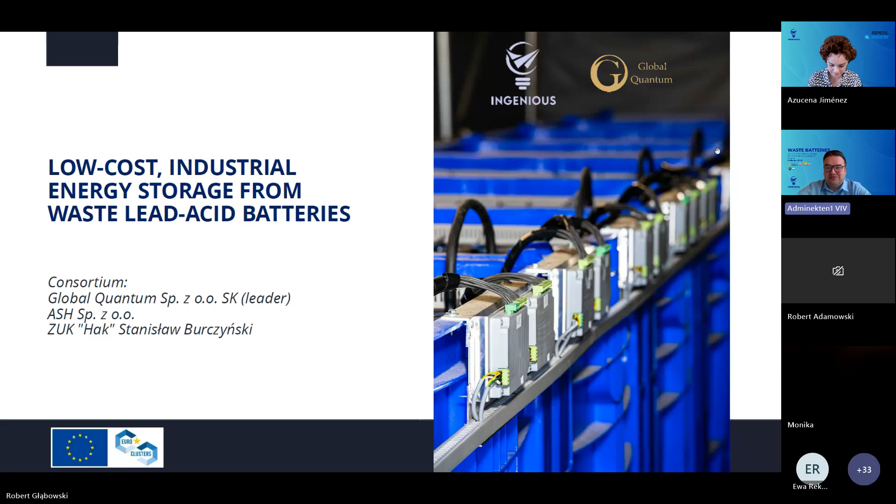Please imagine that by 2040, Poland will have to spend about 500 billion Polish zlotych on expanding its energy grid. It's a huge amount of money, and outdated power grids are unable to meet the required demand for new connections.

As an example, in 2023 distribution network operators denied connection conditions to 7,500 new renewable energy sources, and unfortunately this trend is growing.

This makes Polish enterprises no longer competitive due to the very high cost of energy, and they are denying connection conditions for planned photovoltaic installations, for example. So, is there any simple solution to these problems?

Yes, we think so. We created an industrial energy storage made from reconditioned lead-acid batteries. It is much cheaper, as I will explain later. It's made from waste batteries and quite durable, lasting up to 15 years or longer.

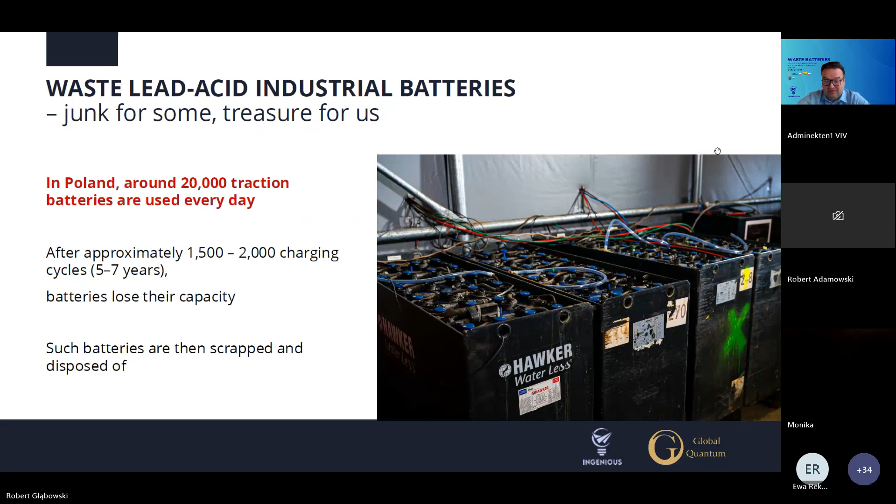In Poland, around 20,000 traction batteries are used every day, and after about 2,000 charging cycles, which takes about 7 years, batteries lose their capacity. Such batteries are then scrapped or disposed of.

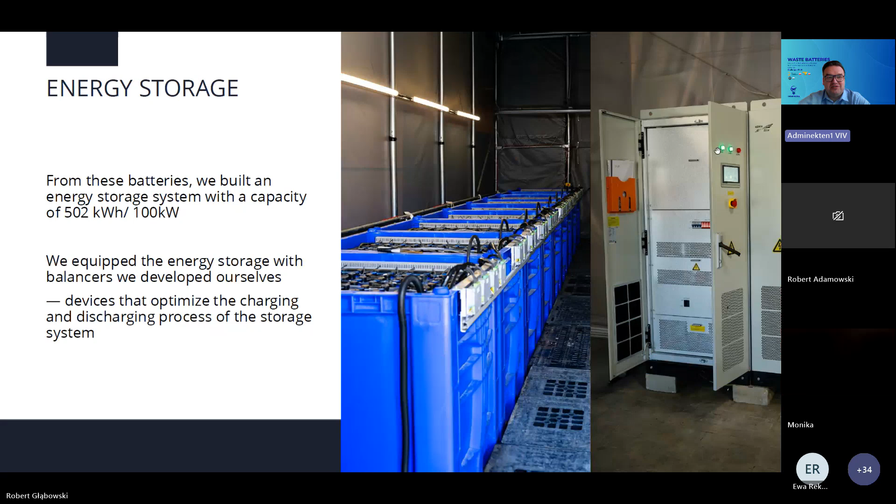So what we did, through the Ingenious program, was recondition 15 industrial batteries with our patented method. Then we built a 500 kilowatt hour storage unit, and we integrated our own balancer hardware to optimize performance. The balancer serves to optimize the charging and discharging process.

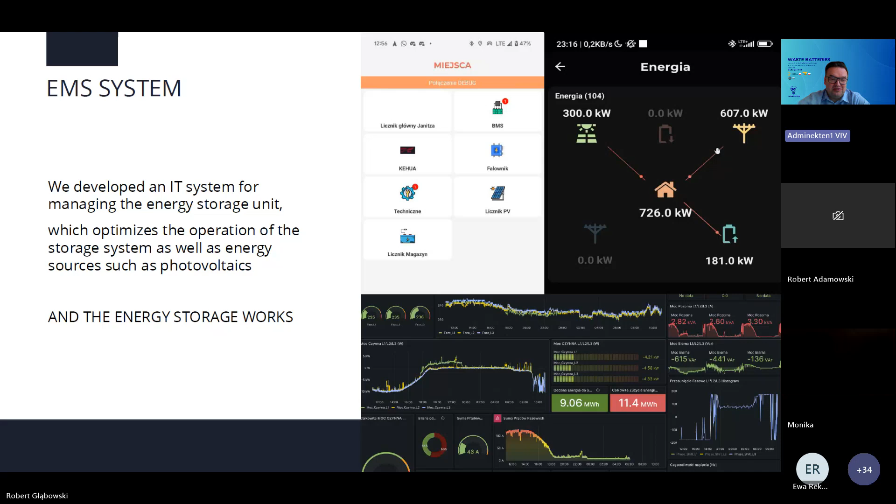We also developed an energy management system, EMS, for managing the energy storage and combining it with a photovoltaic installation.

So our model is quite simple and powerful. We want to build and sell storages based on reconditioned batteries, which are much cheaper than new available devices.

Comparing current prices, a new, most popular LiFePO4 battery with capacity of 150 kilowatt hour costs about 150,000 Polish zlotych. Our equivalent, made from reconditioned lead-acid batteries, costs about 50,000 Polish zlotych, so one third of the price.

So our market is big, and if we could just capture 0.5% of the target market within 3 years, we can earn 30 million Polish zlotych on this program. Of course, we have competition, but with our low prices and easy access to batteries on our local market, I think we are very competitive.

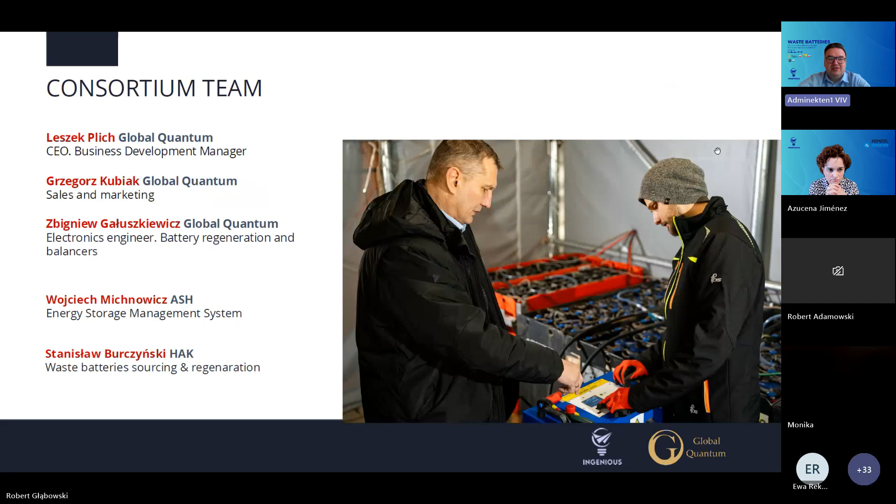So finally, I want to present our consortium team: Leszek Plich, our CEO, myself Grzegorz Kubiak, Zbigniew Gałuszkiewicz, Wojciech Michnowicz, and Stanisław Burczyński. And 3 companies participated in this program: Global Quantum, ASH spółka z o.o., and ZUK HAK.

So our final motto is: waste less, store more. Actually, we breathe new life into waste batteries. Thank you very much for your attention, and I invite everybody for cooperation.

Thank you very much, Gregory. Very, very interesting work, as I mentioned before. Now we will have 3 minutes for questions, if any of you want to ask anything.

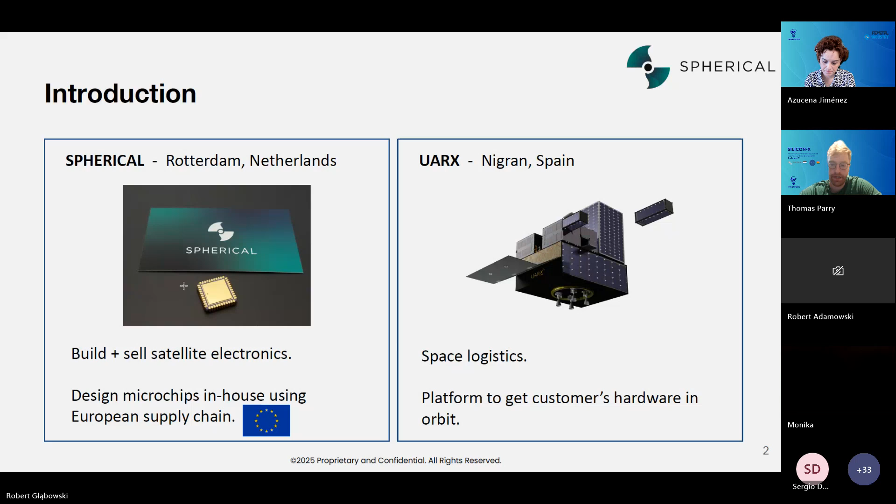The goal of this project was to demonstrate that we could reduce the amount of microchips and silicon used to design satellite electronic systems. There is a high amount of energy used in developing and manufacturing these silicon chips, so if we can reduce that, that's fantastic.

There is also a lot to benefit for the customer if we can reduce the size of the system by about a factor of 10 in the number of microchips. That makes the system smaller and higher performing, which is very good for space, since it has to be launched into a rocket, which is very expensive. We can also have extra nice features like higher reliability and software control.

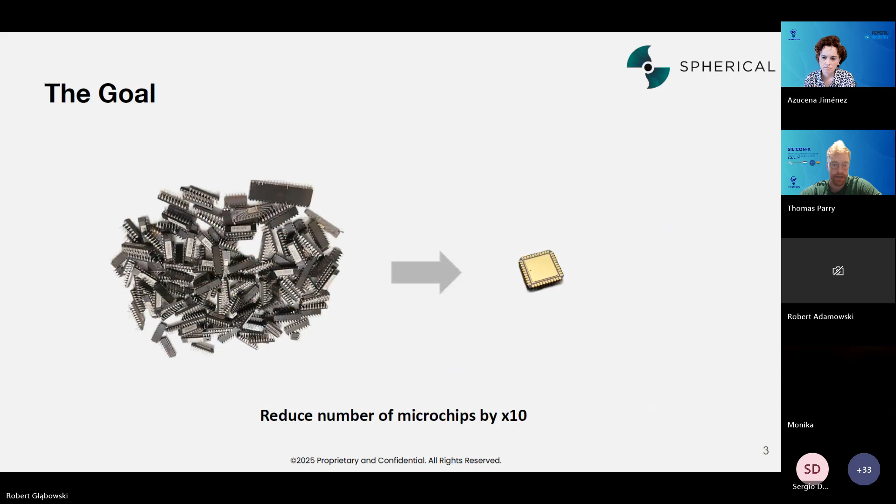So at a high level, this is what we wanted to do. We wanted to take a microchip that we designed, then integrate it into a system that could then be integrated into UARX's satellite, and then launch this to space to demonstrate that the whole concept worked and that we can actually use this new approach to make satellite systems with less microchips.

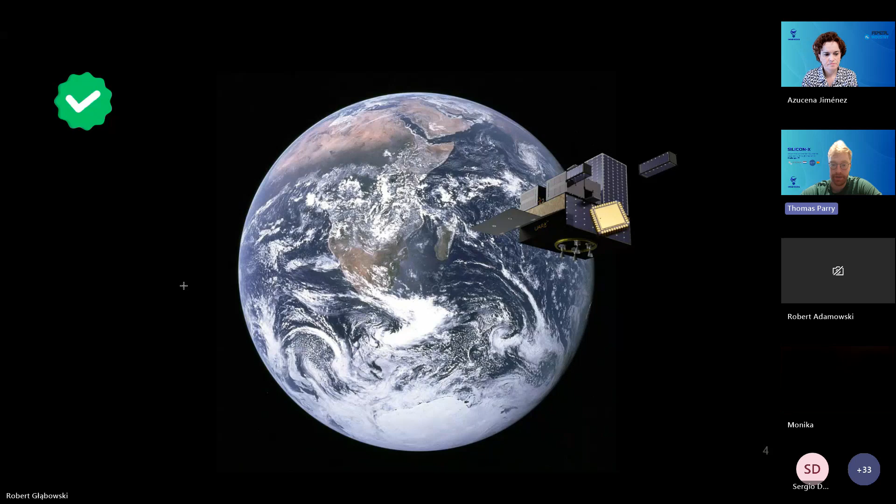So of course, the question is, how did all this go? So this is why we're here today.

It started with our chip that we manufactured, code name BODE. We received this chip from the fabricators and tested it on the bench, showing that it worked satisfactorily and had the right performance we expected, which allowed us to integrate it into a system.

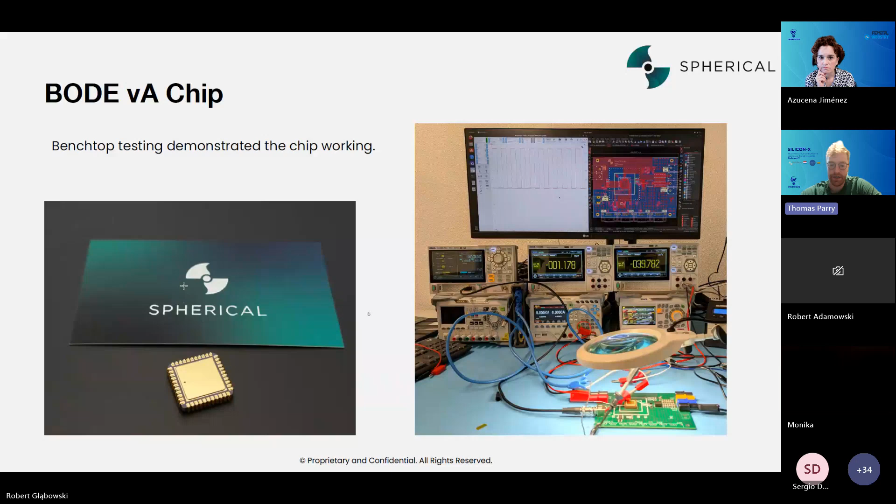The chip was integrated into an electronic system, basically a power management module for the satellite that allowed us to control thermal management heaters on the satellite, along with an array of digital supporting circuitry that allowed us to monitor the system when it's operating in space.

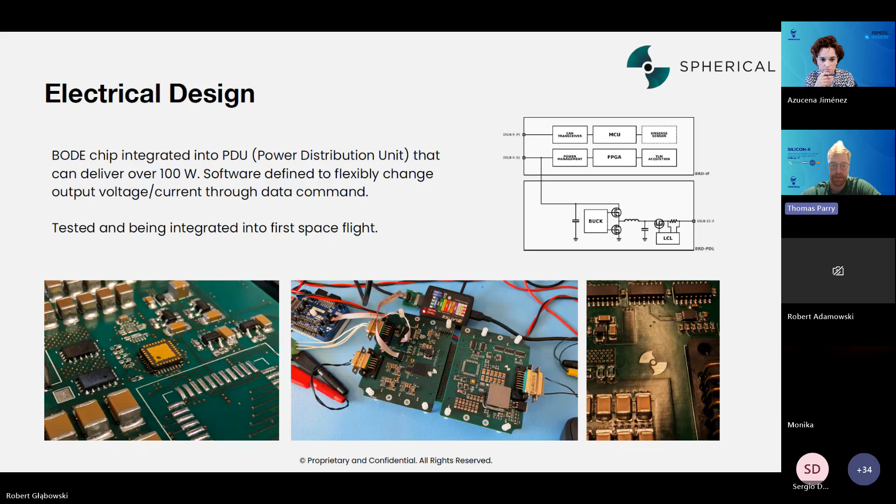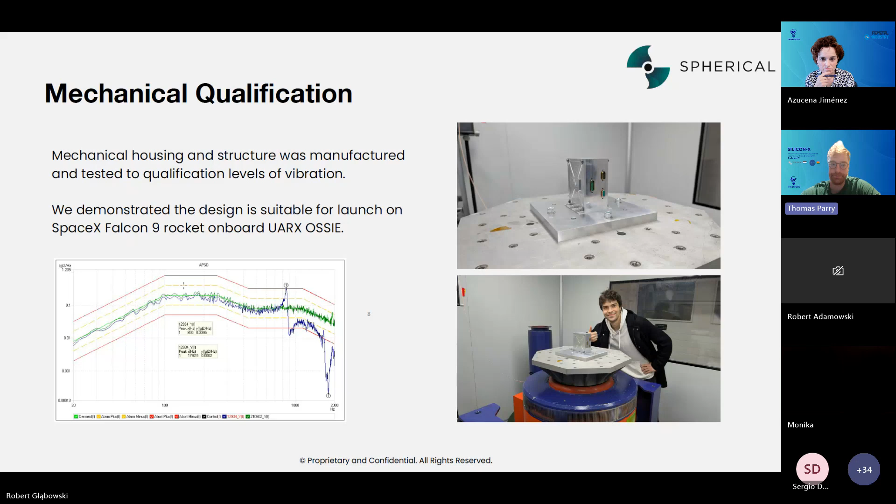In space, we have much higher radiation than on ground, so it's very important to test that the semiconductors and microchips work. We did radiation testing at Holland PTC in Delft, in the Netherlands, where we threw high energy protons at the chip while it's running, and we proved that it was very resilient to this radiation. This was a fantastic result.

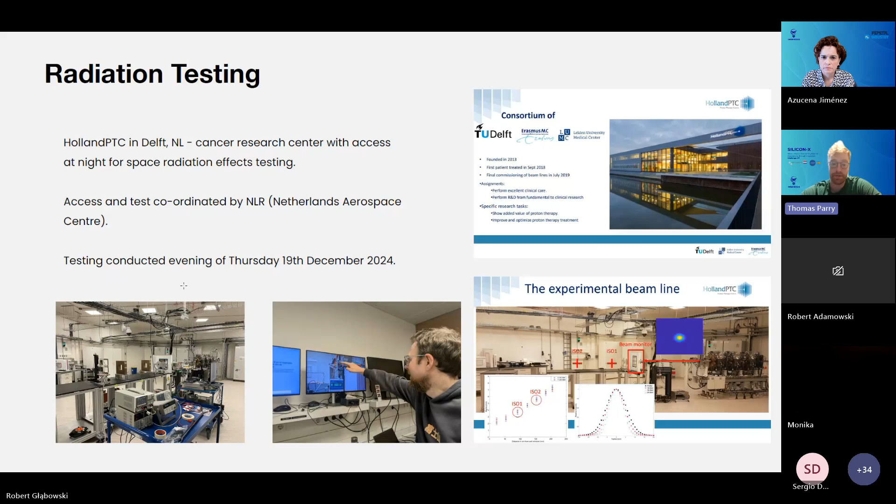So we've basically proved that we can integrate this chip into a system, which can then be integrated into UARX satellites. There's only really one thing left now at this stage, which is to launch it to space. So the next step is that we'll be launching to space on a SpaceX rocket.

This will happen sometime early next year. We're still waiting for the exact launch date, but the great thing is we've achieved all our project goals of demonstrating the chip can be integrated into a system, which can be integrated into UARX's satellite. Now we just have to wait for the good people at SpaceX to launch the rocket to orbit and demonstrate that everything works.

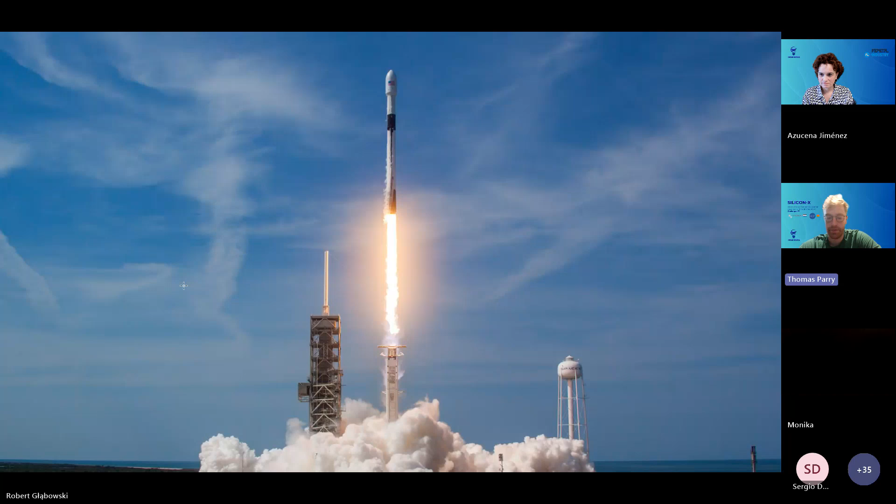So for our side, it's been a fantastic project. We've achieved everything we wanted to do, and hopefully it's going to be the first step in a long and fruitful collaboration between us and UARX.

Thank you. Thank you, Thomas. Thanks for getting us closer to space with this project. It has been very interesting.

So we have some time for questions. Anyone? Because I maybe have one question for you, Thomas.

So what were the biggest challenges you found during the project? Both UARX and ourselves are startups, growing SMEs, which meant over the course of the project we both had to develop our internal processes for getting systems ready and communicating requirements to validate the system for space. When we started, we were both younger companies, and we grew together and learned how to have that relationship and hand over requirements and validation correctly. It was challenging, but very valuable for us to learn that process together, and now we have a very strong relationship.

Yeah, and I think it's a very multidisciplinary project. You involve very different individuals in this project. It's quite interesting, very interesting.

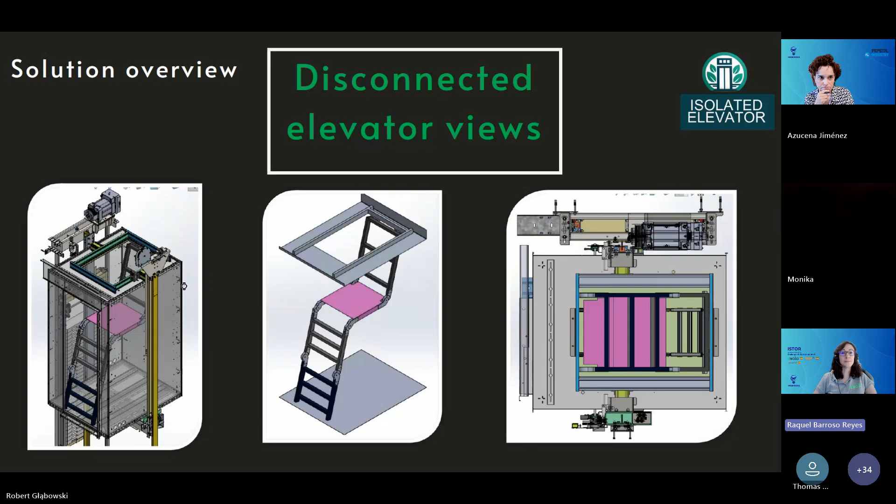Regarding the electronic system, it enables autonomous operation without a power grid connection. This is made possible thanks to the integration of solar panels and regenerative equipment, which work together to generate and store energy efficiently for continuous elevator use.

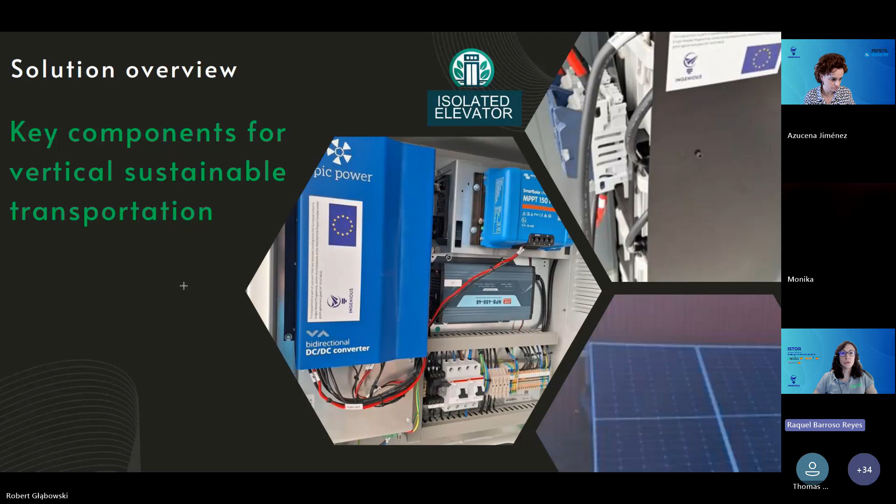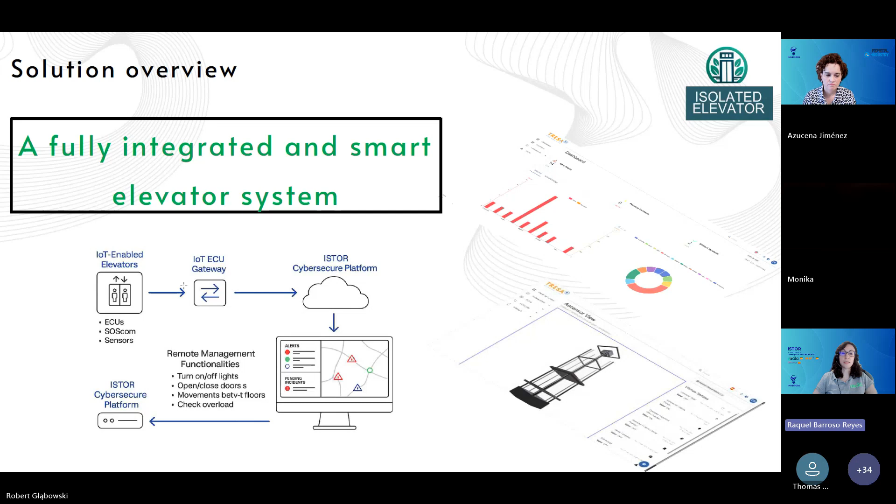Next, please. And last but not least, I would like to show you the technological component, which is the Cybersecurity by Design platform. This platform runs on a continuous cycle of secure data collection, real-time analysis, and automated response. By integrating machine learning algorithms, the system turns raw data into actionable insights, predicting faults, and optimizing its energy consumption.

Next, please. Overall, the ISTOR project addresses key challenges to redefine elevator systems. As it is powered by solar energy, it enables remote monitoring and predictive maintenance to keep lower operation costs. And it's perfectly scalable as it fits several different environments. And of course, I would like to point out the cybersecurity approach as a core feature of this system.

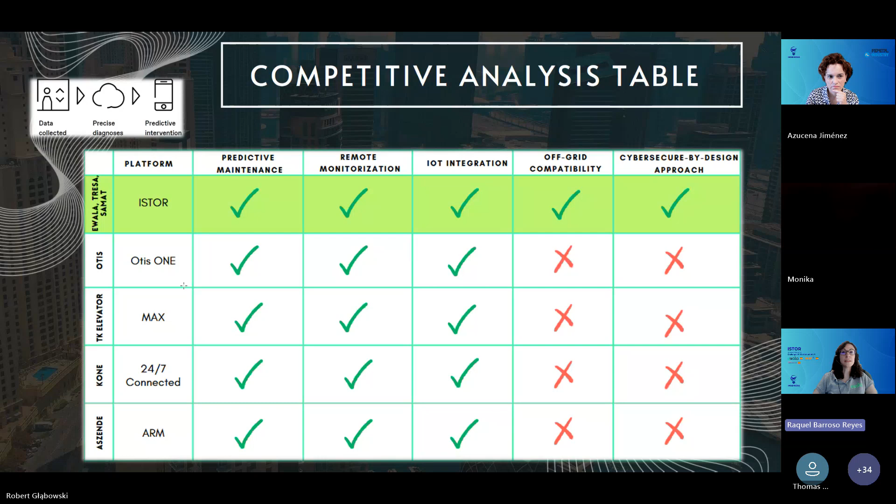Next, please. Okay, in this context, and just focusing on the platform, it is obvious that there are already similar solutions on the market, but none of them are focused on this off-grid compatibility or truly designed with cybersecurity as a core feature. Next, please.

Regarding the revenue streams, we plan to sell the ISTOR elevator system directly and to offer this software as a service licensing with annual subscriptions, and probably making possible the access of premium services related to advanced analytics and priority support. Next, please.

So that's it. I would like to thank the cluster, the INGENIOUS cluster, for supporting our project, and also our partners, Ascensor Tresa and INGENIERIA-SAMAT, for their invaluable collaboration, and of course all of you for your kind attention. Thank you.

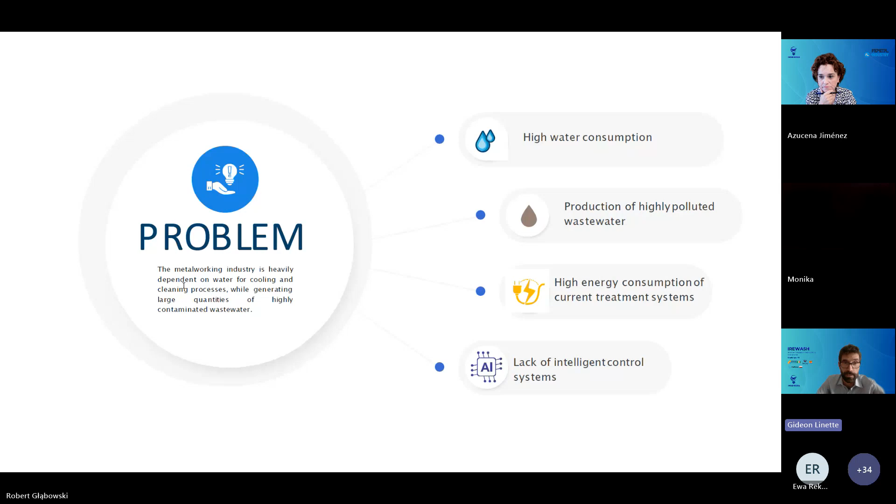Next slide, please. Our solution combines advanced water treatment with digital intelligence. The system integrates two patented technologies by Iris SRL. The first is a pulse discharge plasma, also known as PDP, that removes over 85% of pollutants without the use of chemicals. The second is an ultrafiltration machine with efficient filters to purify impurities for water reuse.

In the next slide, you can see an infographic. On the digital side, we have partnered with GridMetrics for real-time monitoring, predictive maintenance, automatic pressure control and optimization with artificial intelligence, and also a digital twin for simulation and control.

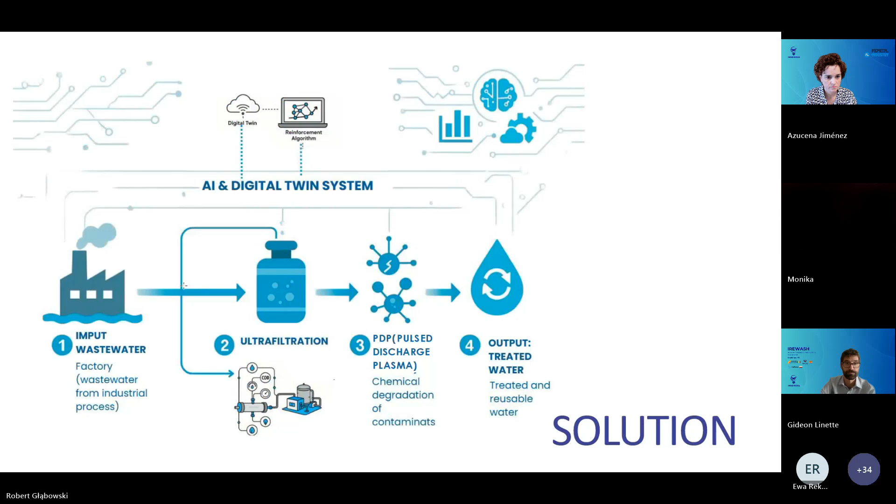Here we are with validation system and control. Our system achieves over 85% contaminant removal, especially perfluoroalkyls and other different species of interest, up to 70% water reuse, 30% energy saving, and elimination of glycol and biocides in chillers for safer, cheaper operation. Chemical oxygen demand is reduced by more than 90%, and there is a turbidity reduction of more than 99%. That is a very good result.

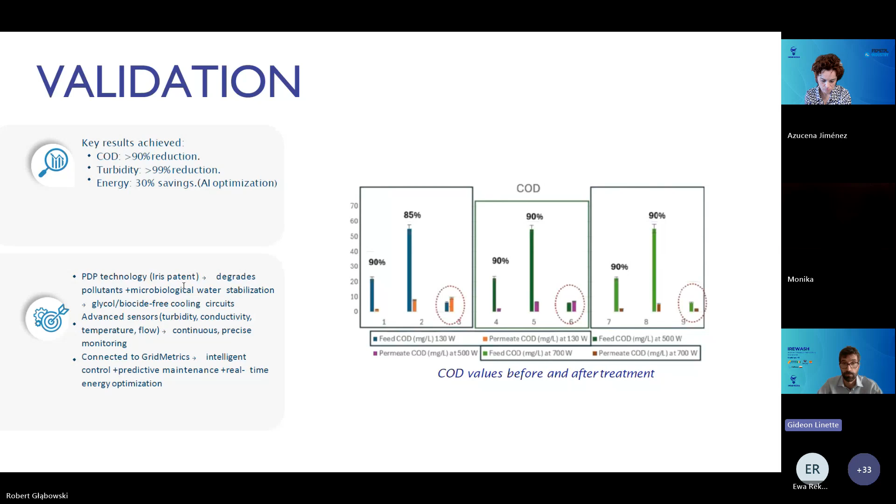Next slide, please. Okay, we reach now the market potential. Our primary target, of course, is SMEs in metalworking and mechanical engineering. These businesses have high water use and are facing stricter environmental regulation. We see high growth potential, especially in Asia, India, Japan, and China, where eco-regulation and manufacturing growth are very strong. Our go-to-market strategy involves local partnership and presence.

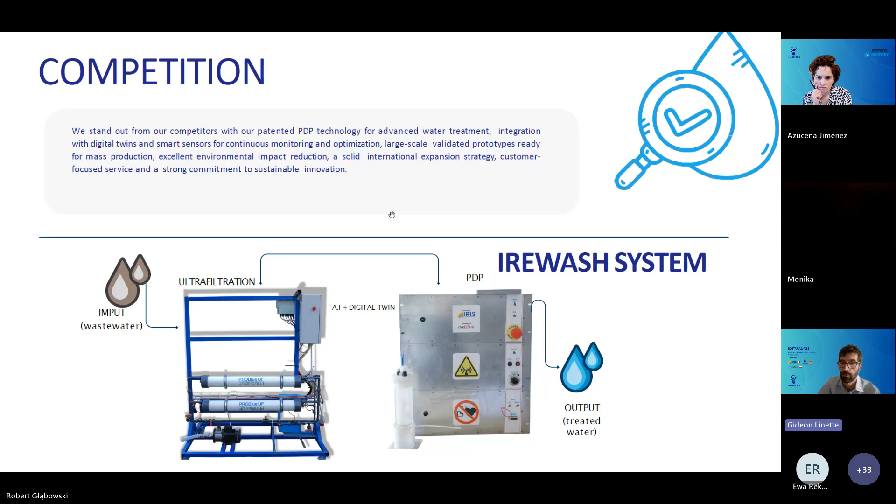Okay, next slide, please. Our business model and roadmap: our goal is to reach TRL 9 this year, and next start commercial sales in 2026 with a potential of 600 units sold by 2030, and expand to India, China, and Japan by 2031.

Next slide, please. Our expertise is advanced water treatment technologies. I want to thank also GridMetrics and Durante Space Technologies for their strong skills in artificial intelligence and digital solutions, especially digital twin and sensor engineering, prototype development, and system integration and scalable application deployment.

Okay, that's all, and thank you for your attention. Don't hesitate to contact us if you have any question or any doubt.

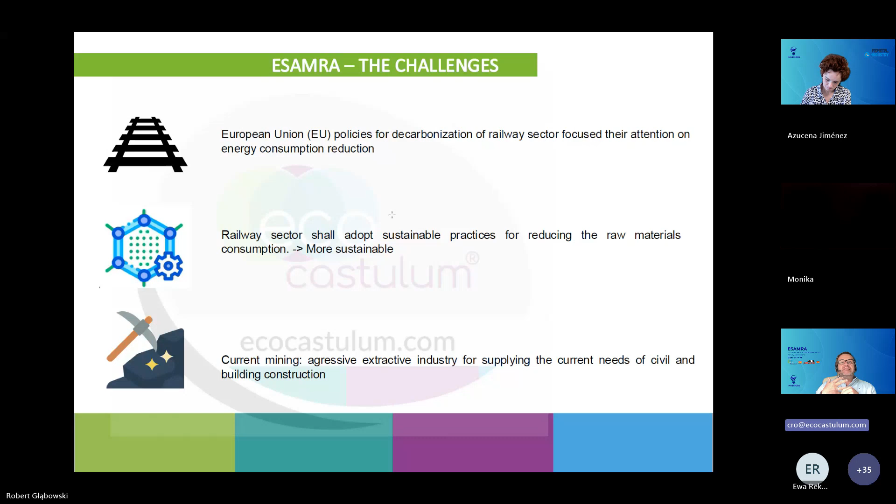Please, next slide. The concept of ESAMRA emerged in response to multiple strategic challenges identified by the European Union. It aims to align with European Union policies on the decarbonization of the railway sector, promoting a significant reduction in the carbon footprint through advancements in rolling stock, infrastructure, and operational efficiency. Additionally, ESAMRA is aligned with the Net Zero Mining Waste initiative, fostering circular economy models in the raw materials value chain.

Next slide, please. Therefore, at Ecocastulum, we apply a specific technology, the geopolymerization of mining and industrial waste, to develop an advanced, sustainable material for the railway sector. This material offers enhanced mechanical performance, reduces environmental impact, and supports circular economy models through the valorization of different waste, both mining and industrial.

I would like to clarify that the ESAMRA project was composed of two phases. One of them was the development of a specific prototype, the railway sleeper, plus a feasibility study of this circular economy business model applied to the slate stone mining sites. Next slide, please.

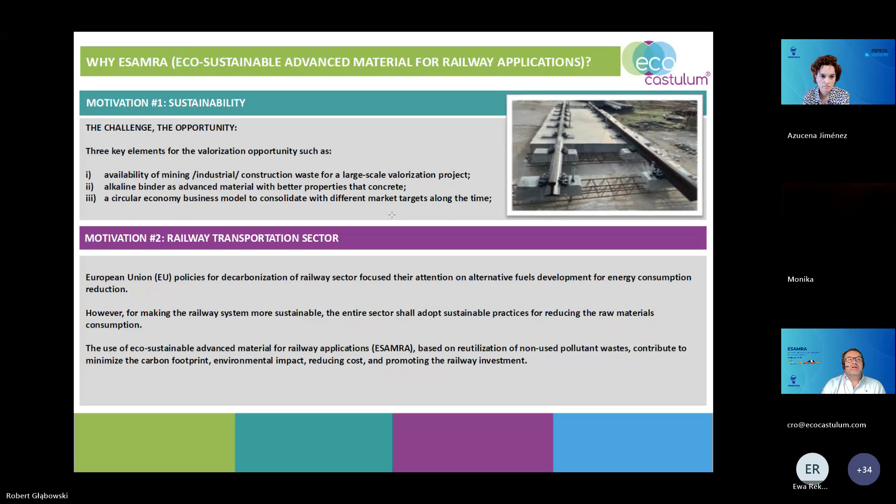So another motivation was to use an advanced innovative material, recycling mining and ceramic waste, and also industrial byproducts, using blast furnace slag as aggregates, reaching specific performance better than the requirements required by the Spanish railway administrator.

At the end of the project, we reached 38 megapascals of compressive strength when the requirement was 30. We also provide the most sustainable material, promoting sustainable and circular economy, increasing the life cycle, as an alternative to concrete and existing polymer plastic sleepers, with specific resistance to acid attacks, sulfates, and freeze-thaw cycles.

Another motivation, maybe the most important, is about the capex, the cost. With the feasibility study we developed during the ESAMRA project, we estimated the cost per unit. With the geopolymer technology we applied, we estimate the cost is 75 euros per unit. Someone could say, okay, 75 euros, and with concrete it's 205.

But when you extrapolate this to the railway lines, considering that 1 kilometer of line requires 1,666 sleepers, here you can see the great advantage. In the table, the cost per kilometer is 250 thousand, compared to 684 using concrete. Therefore, there is a considerable cost reduction.

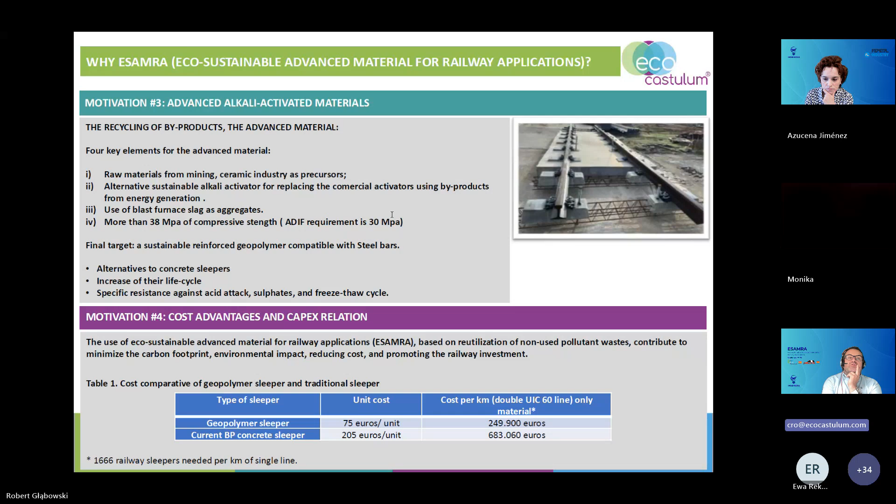Here you have a photo. To be honest, the idea of ESAMRA arose years ago when I worked in Saudi Arabia, because there you don't have too many resources. One of the motivations and goals of ESAMRA was to demonstrate the potential of valorization of mining waste and industrial byproducts using alkali activation materials to develop an innovative material for a specific sector.

We are fully aware that we cannot compete with concrete. However, we can make mining more sustainable through this kind of valorization strategy.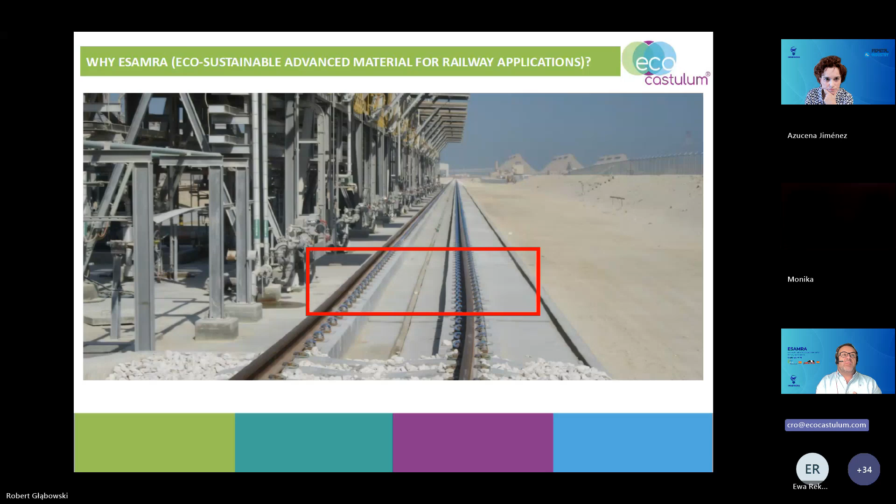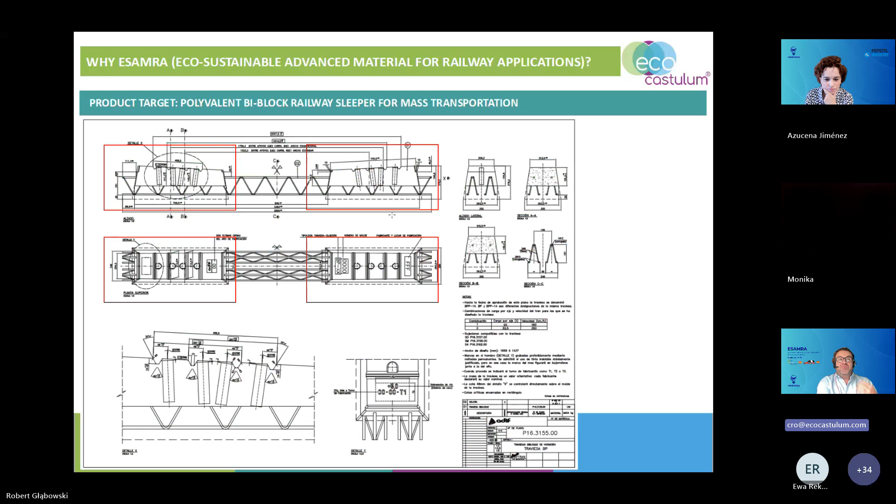Here you have the official drawings of the prototype, the polyvalent bi-block sleeper for mass transportation. That was the real scale prototype that we developed.

Also the targets that we had at the beginning of the project: development of a material that can be upgraded with CO2 capture capacity, and even decrease the cost further by testing different raw materials. One target was to create a synergy through a valorization program across the mining, industrial, and construction sectors, with the strategy always fully aligned with European Union policies.

Please, next, Azucena. Raul, you have just one minute more, okay? Try to finish, go to the next.

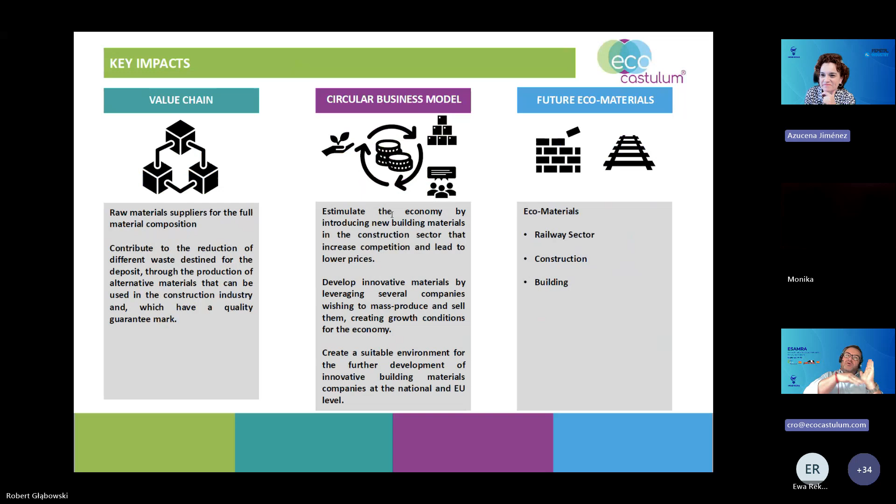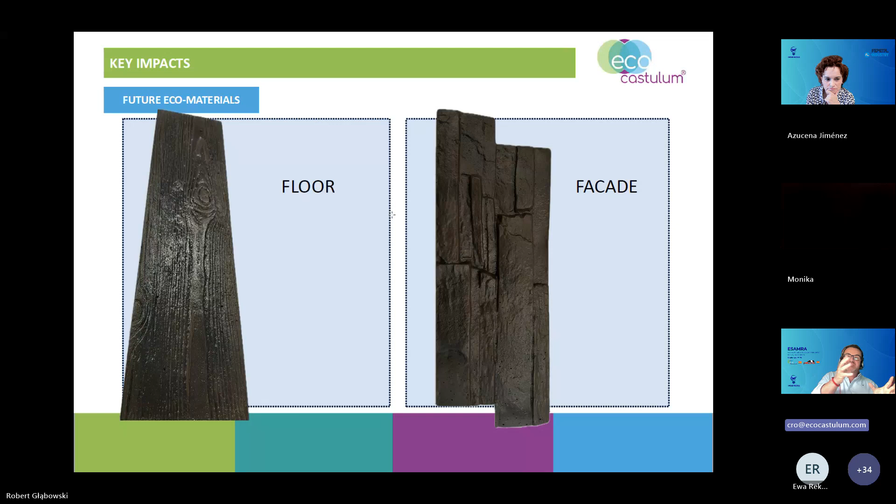Here you have some examples of different materials we already developed, apart from the railway sleeper, in which we also have capacity, because this technology can be extrapolated to civil engineering and building applications, including some non-structural elements where the requirements are less demanding.

That's all. I'm really sorry, but the project was really amazing. I have too many things to say, but I have to summarize, and I'm sorry for being a bit longer. If you have any kind of question, I will be really happy to reply.

Thank you very much. Okay, thank you, Raul, for your presentation. Very nice again. Since you were a little bit extended, maybe we have time for one question. Someone?

Eva? Yes, you mentioned, thank you for the presentation. I was the one doing the internal evaluation of your proposal, and I really, really enjoyed it, even though I didn't understand much, but it was a well-written and very good proposal. So thank you for that.

You mentioned that you are planning, and already started, to apply this geopolymer material to other sectors. What sectors would that be? Civil construction and buildings. Civil construction means bridges, roads, etc.

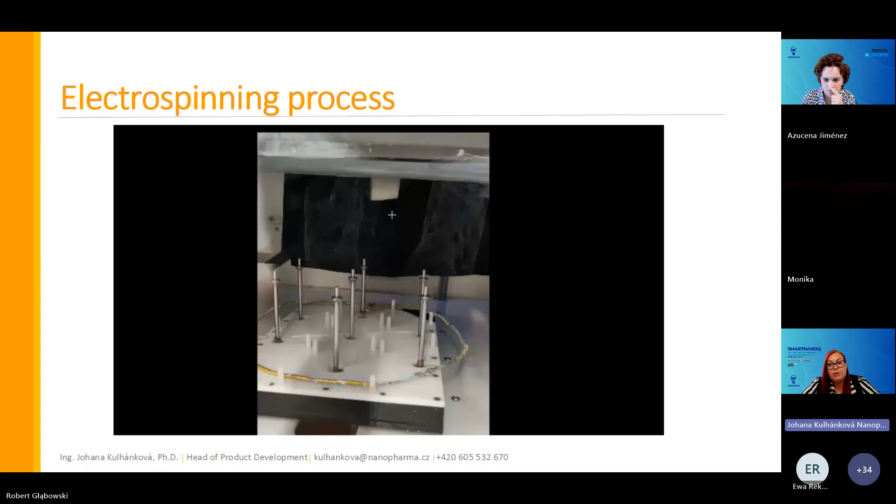At the bottom of the device, you can see the spinning electrodes where the polymeric solution flows. Then in the middle you can see this web a little bit. You can see the jet of formed nanofibers, which are collected at the top on the nonwoven fabric. This fabric moves at a defined speed, resulting in a roll of nanofibers attached to the fabric, and then the fibers are processed for final use.

Challenges with nanofiber production include the delay and ineffectiveness of quality control, which is usually post-processed. Defects can go unnoticed until the end of the process, causing material, time, and energy waste. There is growing industrial demand for consistent, high-quality nanofiber layers, combined with enhancing productivity and focus on innovative capacities. Our solution fills this gap, and its modular design makes it attractive and can accelerate the access of new nanofiber products and services to the markets.

Our solution lies in implementing quality control directly into the fabrication process by designing a combined hardware and software system. There is a missing loader from the picture, sorry about that, but you can imagine it a little bit. We optimized the imaging setup, consisting of a camera and lighting system, which scans the entire width of the emerging winding.

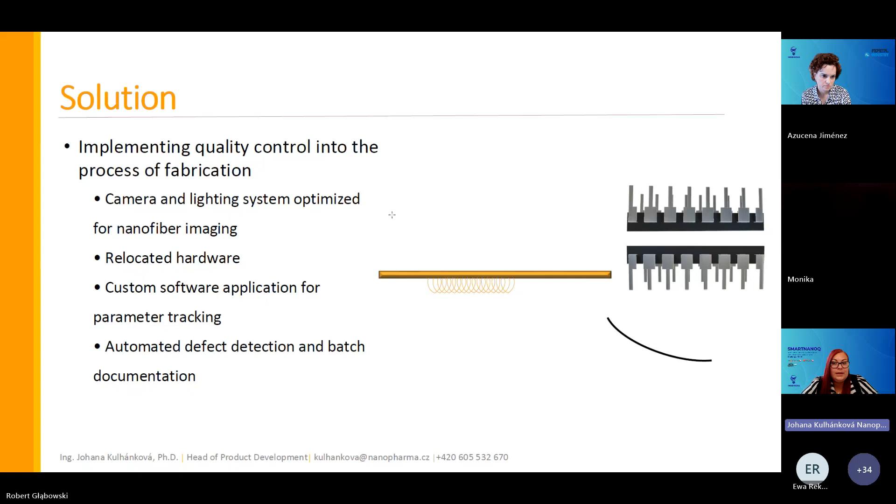The camera is connected to additional hardware, which processes these signals. We also created a custom application that automatically logs and analyzes critical parameters while ensuring defects are caught during production. The whole process runs in real time, meaning if large inhomogeneities are detected, it alerts the operator and demands correction of parameters. If only small defects are detected, there is an automatically generated report with marked and captured positions of these inhomogeneities.

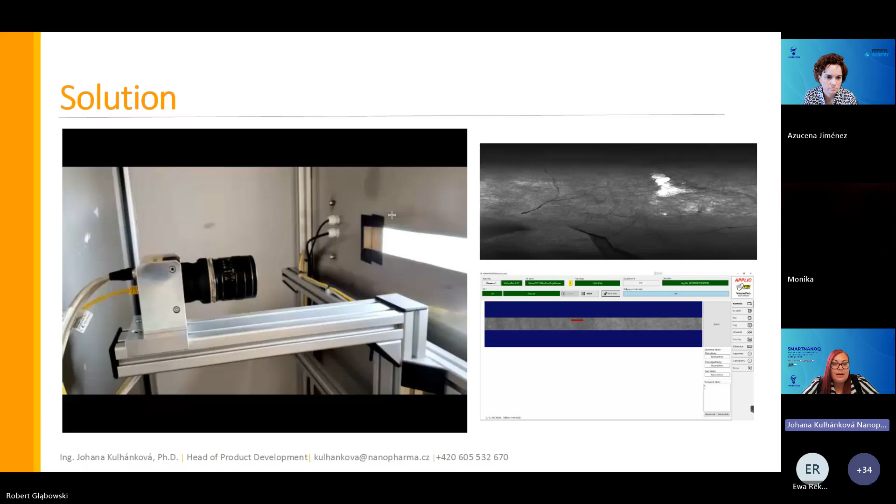Here you can see the integrated camera, which is also shown in a video, so sorry, we cannot play that. The camera scans the whole width of the winding. On the top right, you can see a figure of a detected inhomogeneity, and on the bottom right, the software solution which marked this error and saved the data for the protocol.

It's very difficult for us to define the market for such a specific technology like electrospinning. Hence, we focused on the overall quality control segment, which addressed $0.3 billion in 2024. Europe addresses around 30% of the world segment based on market segmentation, and within our specific niche of automatic quality control for nanofibers and smart textiles, we estimate our initial obtainable market share at around 0.5 to 1.5% of the European share. As demand for defect-free technical materials grows, especially in sectors like healthcare and automotive, our modular and scalable system positions us to grow beyond 10 million euros per year in long-term revenues.

We would like to operate on a B2B model, building a direct partnership with manufacturers who need a reliable quality control system for advanced production lines. Our solution is designed to be modular, combining customizable software with flexible hardware components, so it can be easily integrated into different production environments. In addition to the core system, we offer installation, training, and ongoing support as paid services, which allows us to maintain high quality and client satisfaction.

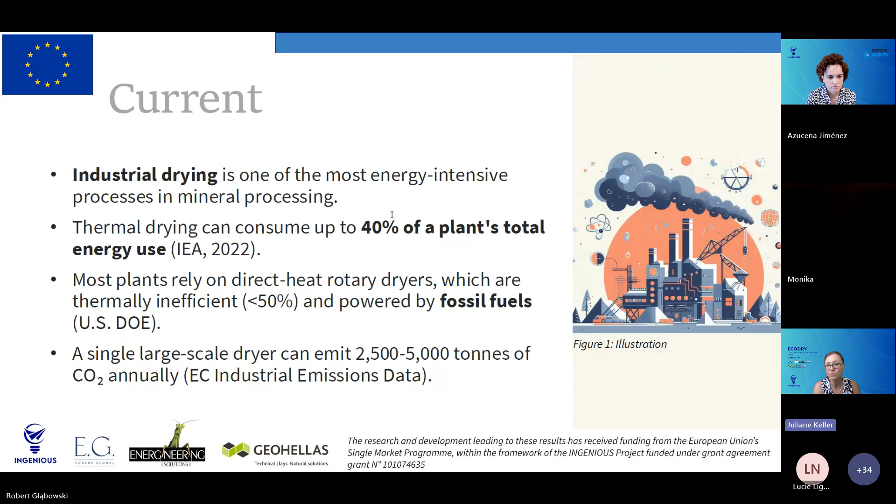Industrial drying is one of the most energy-intensive processes in mineral processing, which gives a lot of pressure to manufacturers or plants, who use up to 40% of their total energy just for drying processes. Typical industrial dryers are direct heat rotary dryers, which are thermally inefficient and powered by fossil fuel, which is, as we all understand, a pressing issue. And to give you a good equivalent, a single large-scale dryer can emit up to 2,500 to 5,000 tons of carbon dioxide annually, equivalent to the energy consumption of 300 to 600 households. So let's go to the next slide, please.

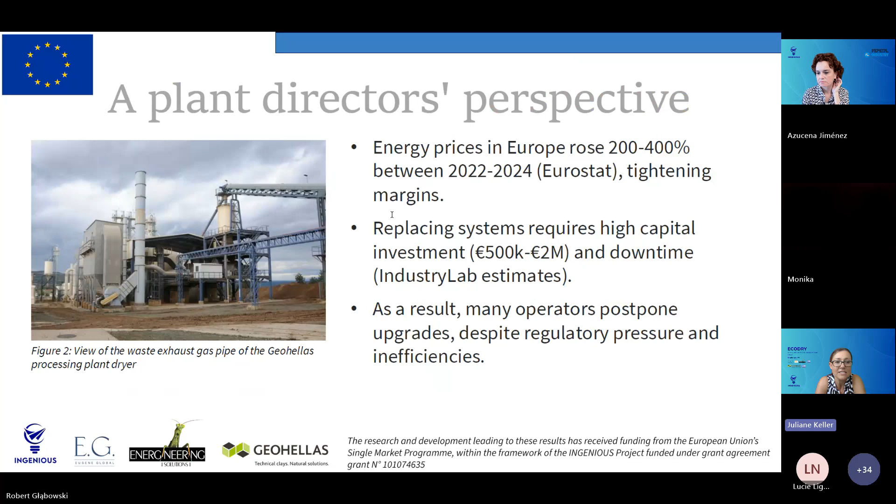So our solution, EcoDry, is a compressor-driven drying system for industrial use, and it uses a high-speed centrifugal compressor to increase the thermal efficiency. It is built for retrofitting, an upgrade of plant facilities that integrates into existing drying lines with minimal disruption. It is modular, scalable, and supported by an energy-as-a-service business model, which we will look into in the next slides.

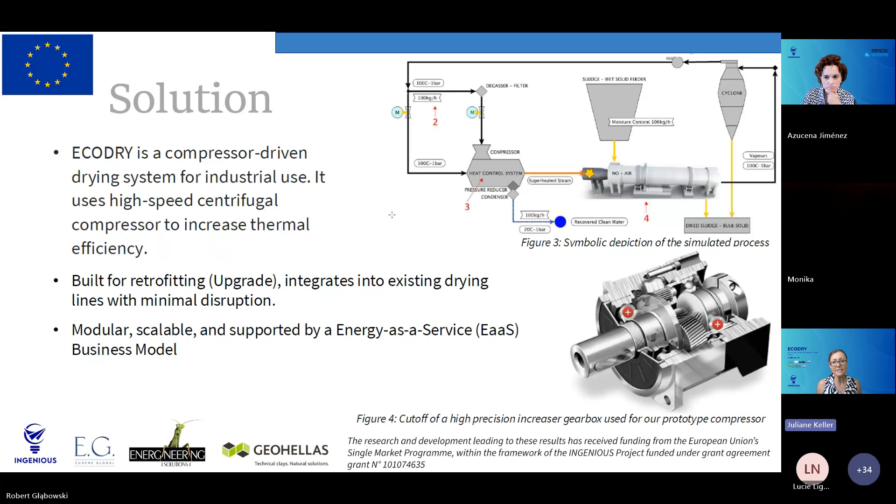During the INGENIOUS project implementation, we developed two prototypes of the technology. The first was a small-scale laboratory prototype, which was tested successfully in the first half of the project. Then we moved to the industrial-scale prototype, which we implemented in GeoHellas's plant in Greece. The industrial-scale prototype was accompanied by a digital twin simulation to collect data and see the outcomes. The simulation accuracy we could get to 72%, so we could take the data and optimize the system further.

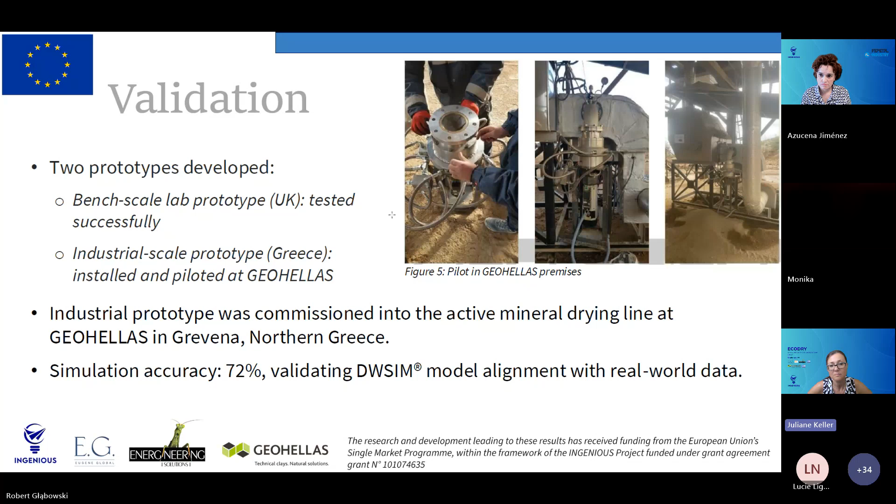Next slide, please. The data we collected during our pilot test was integrated fully into the eQuad Capital platform, where all the data can be found for investor access and due diligence. During the project, a part of it was a very extensive risk assessment and business continuity plan, which we created specifically for the implementation of EcoDry. And GeoHellas, our industrial partner, has already declared interest to scale up the solution into their daily business operations. Next slide, please.

So if we look into the market, we have two target market segments. The first, the obvious one, is mineral processing plants, so any plant processing bentonite, kaolin, perlite, anything mineral. The secondary target market segment is wastewater sludge drying, because the system is ready to be used in all industrial drying applications, and wastewater sludge drying could be a very interesting second market.

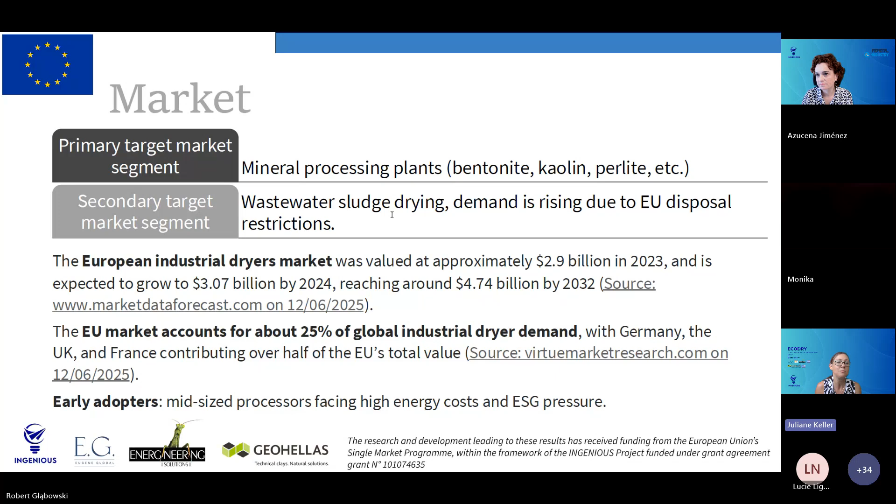If we look into our competition, we compete with direct heat rotary dryers, which are inefficient and fossil fuel reliant. There are solar thermal collectors, which have low OPEX but need space and may face weather constraints. Heat pump dryers are efficient but usually have quite high installation costs and complexity. EcoDry can point to lower OPEX, especially using the energy-as-a-service business model. It's retrofittable, meaning minimal space and plant modification needed. We have the integrated simulation, which is a great approach for optimizations, and we've already demonstrated performance in real industrial conditions.

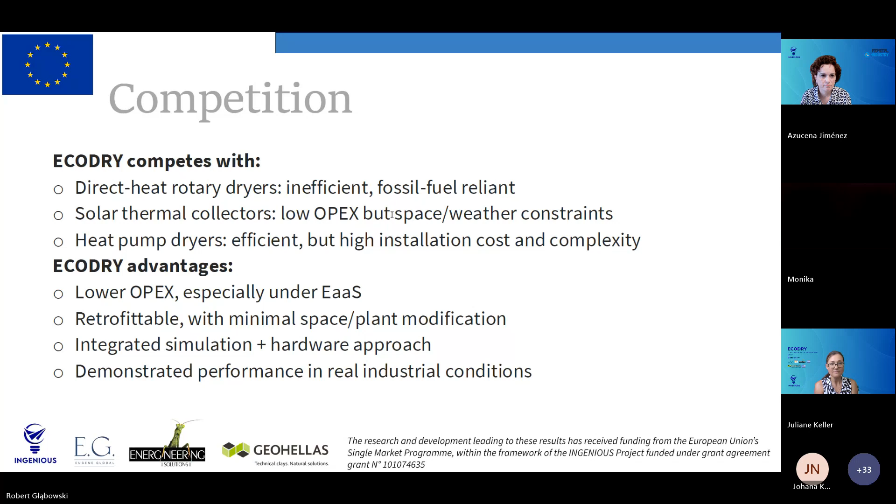Next slide, please. The energy-as-a-service business model, put simply, means the client pays based on performance, based on the energy saved. There's no upfront CAPEX and therefore lower adoption barriers. Anticipated revenue streams include long-term based contracts, optional maintenance and service bundles, and future performance data services.

Investors' involvement would enable us to launch GeoHellas as a full customer and expand our outreach via energy consultants and industry partners. As I mentioned before, all data is already implemented in the eQuad Capital platform. Thank you for your patience and time, that's from my side, and I'm happy to answer questions.